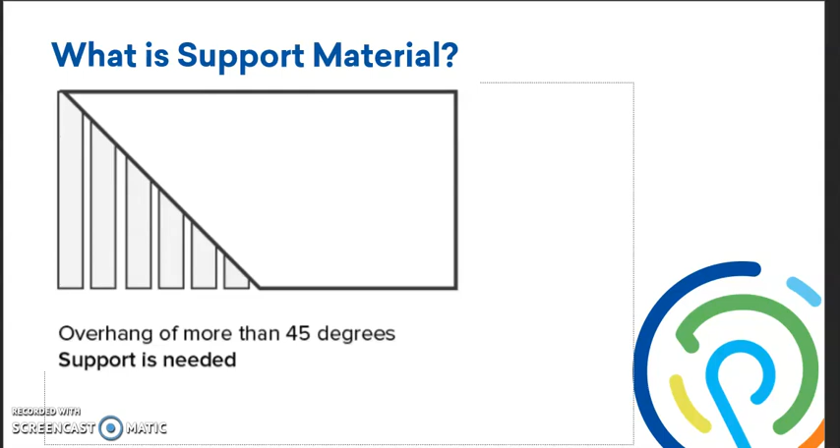If support material is going to help my part succeed, why would I want to avoid them? Well, material costs money, and support material is just wasted material. Supports are also going to add time to your total print and processing time. Sometimes supports, especially in tricky areas like internal channels, are difficult to remove and can be a lengthy process. Support material also runs the risk of ruining your surface finishes. This is especially true with features such as threads.

It's not recommended to 3D print threaded features, but sometimes it's necessary for your prototype, and knowing the techniques to avoid support material is going to be beneficial to have in your back pocket. With all that said, let's jump into a part and look at some of the techniques that we can use to avoid support material.

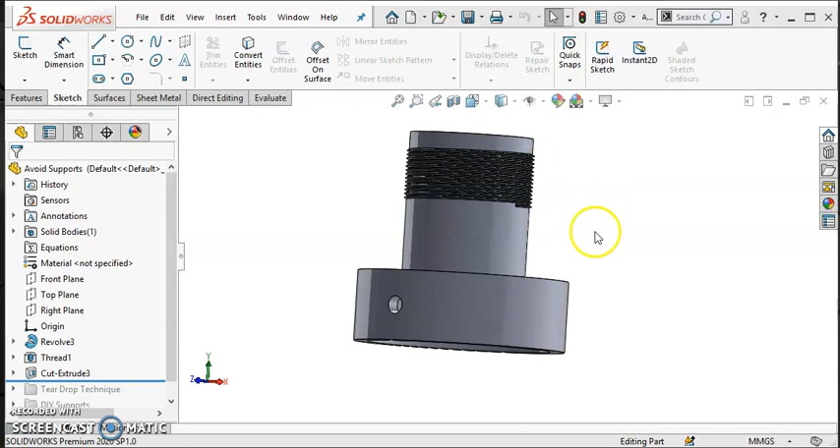As you can see, this part has threaded features, so in order to 3D print it, we're going to need to turn support material completely off. But by doing this, we're going to jeopardize some of the other features that are going to require support material, such as this overhang, because it's 90 degrees from vertical, and this hole.

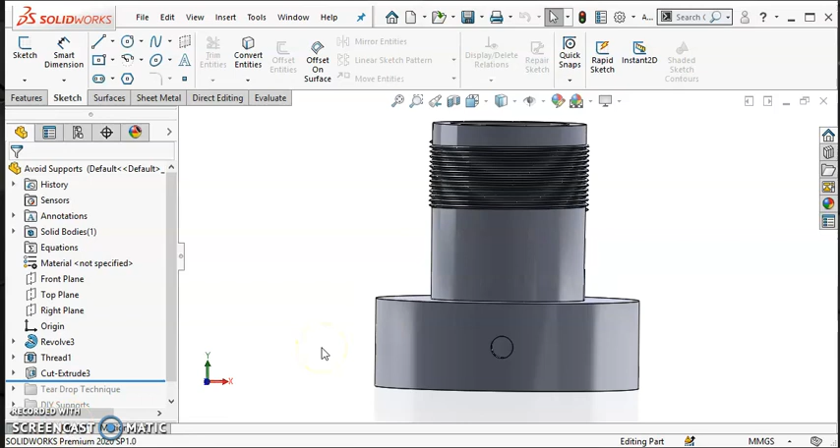Let's start by focusing in on this hole right here. This hole is going to require support material because as the curved edge of the circle or the hole approaches the top, its angle is going to exceed 45 degrees, therefore requiring support material. So this geometry is going to need to be altered a little bit.

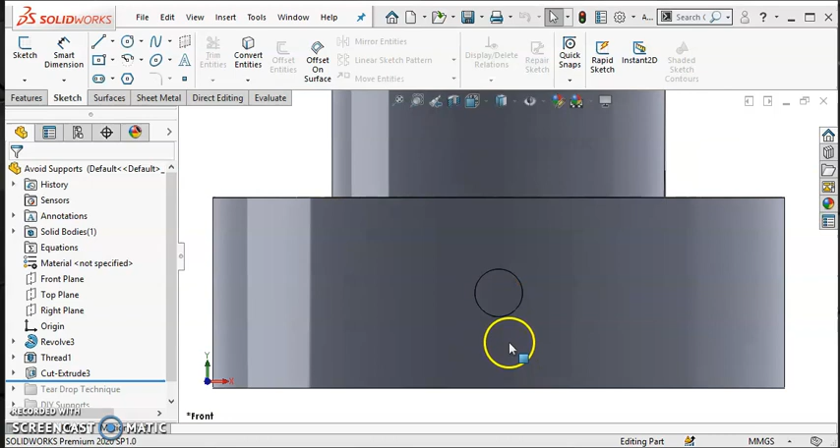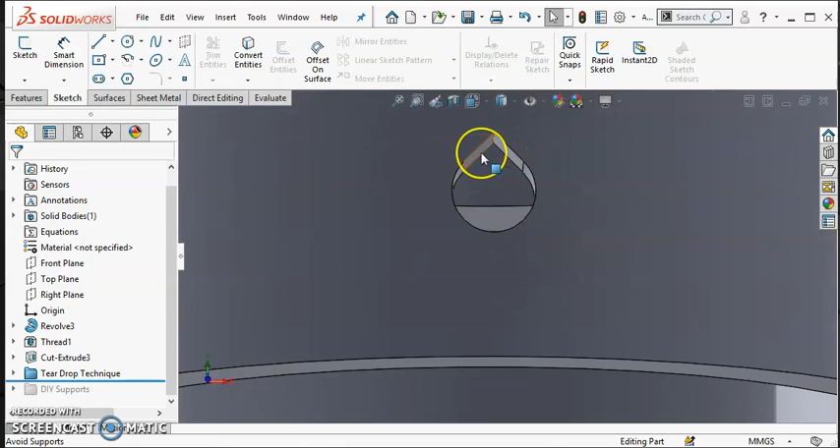A common technique for doing this is to use something called a teardrop technique. This is reshaping the hole from a circle to be shaped similar to a teardrop. What this is going to do is it's going to force and ensure that the angle right here and here is always 45 degrees from vertical, therefore not requiring any supports. You could have also reshaped this hole to be a diamond shape, doing essentially the same exact thing.

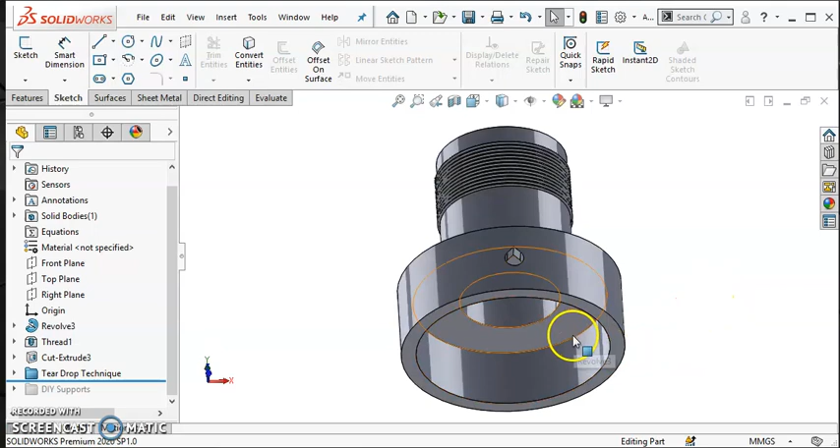But what happens if the geometry cannot be altered, such as this bottom overhang? The geometry of this bottom is being driven by another piece that's going to sit inside it. So avoiding the support material is a little bit trickier. For this example, we're actually going to create and design our own support material within this part. We're going to create a multi-bodied part.

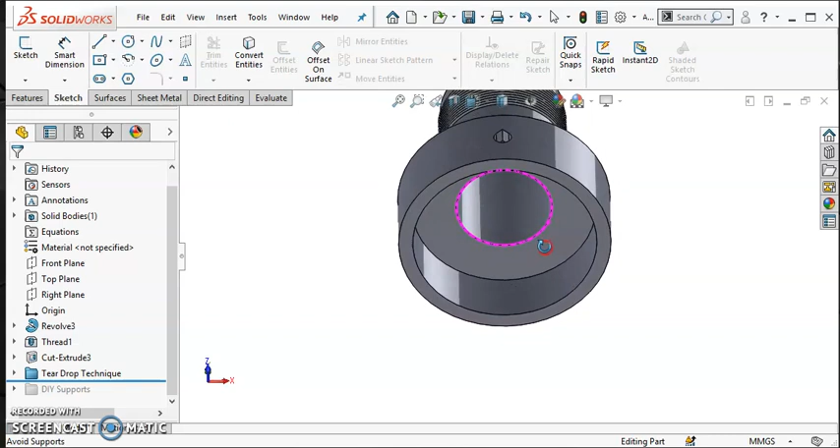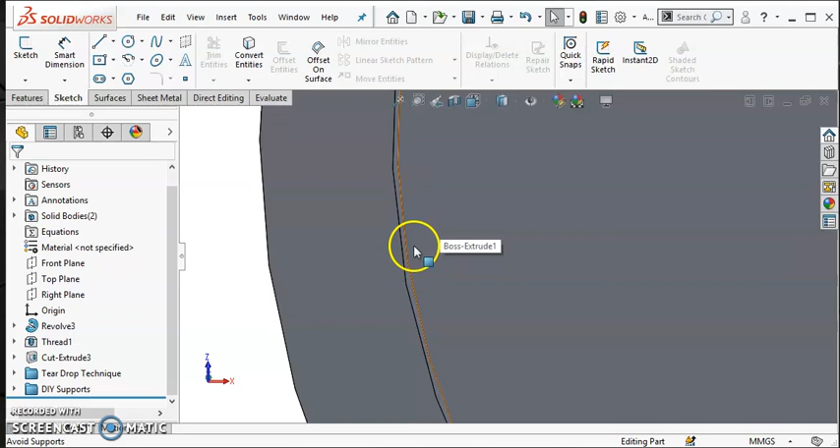The reason why we want it to be a multi-bodied part is so that the support material doesn't fuse with the actual part itself. So to ensure that the part doesn't fuse with the support material, we're going to use a 0.2 millimeter or 200 micron offset in all directions. So if I go in here in a section view, you can see that in SolidWorks, there's a little bit of a gap.

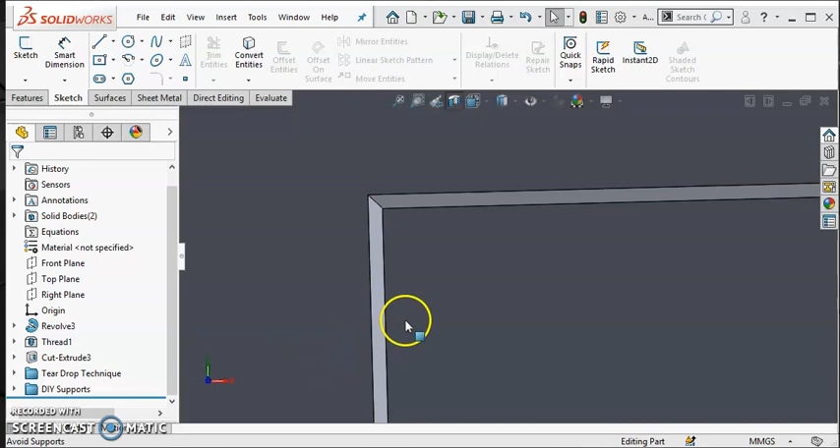This 0.2 millimeters is going to ensure that no material gets printed in between the supports and the part, while also ensuring that the part and the support material don't fuse together. If you want also, you can add this little cutout right here to make it a little bit easier to remove the support material from the part.